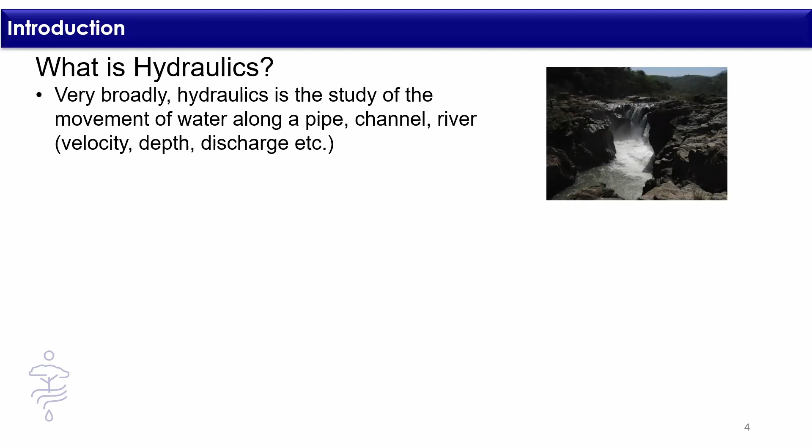So if we just get straight into it - in terms of the hydraulics, generally it's really understanding the flow and movement of water. From an engineering point of view, it's generally along pipes and channels, irrigation canals, etc. In this application, we're looking at the movement of water specifically through rivers.

In terms of why it's important in the eFlows - the eFlows, or environmental water requirement studies, environmental flow studies, reserve determinations - these studies go by various names. Maybe just a little bit of background: they are generally a requirement from the Department of Water Affairs, and it's really there as a voice for the environment.

So really to understand, if you are issuing water use licenses for abstractions, how much water can you take out of a system before you actually start compromising the health of the system, before the services that are provided start collapsing. And the other side of the coin is how much water can you add to these systems before you also start compromising their health.

And that obviously links to inter-basin transfers and also wastewater treatment works. So you're actually adding water to systems, and how does that affect the health of the systems.

So really the hydraulics component allows us to get an understanding of the water levels. Critically, you have a whole bunch of stuff going on in rivers, fish and inverts being one of them. Various fish species prefer certain types of habitat, and that's really linked to your depth of flow and your velocities. So yellowfish, for argument's sake, like shallow, fast-moving water.

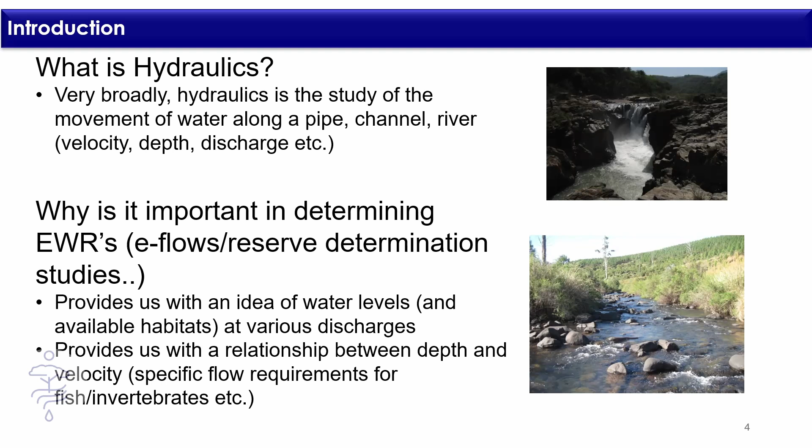Sarge mentioned a little bit about the IWMI project, the International Water Management Institute project. We were fortunate enough to be involved in this project last year. We managed to get some funding to look at some innovation around the eFlows and how we collect data, how we interpret that data, and how we can look at improving the confidence in those things.

At GroundTruth, we do run a full drone survey system here. We run LiDAR imagery. We do a lot of work around water quality and also looking at particle image velocimetry, which Udhav will chat to later - really a technique around measuring velocities of water from video footage.

The output data from that - being able to generate point cloud data for the bathymetry, so below the water level and above the water level using the LiDAR, being able to stitch that data together using imagery, looking at the velocity and tying that into a hydraulic model, which then could generate these habitat distribution maps, and improving your confidence in your results.

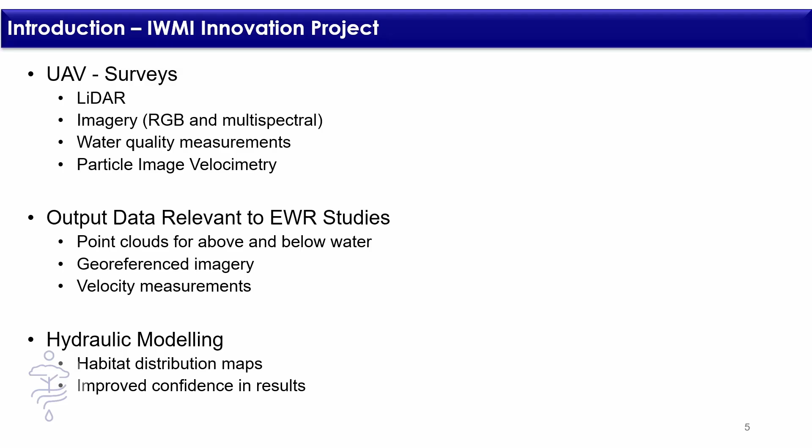So that was the IWMI project, which Udhav will touch on a bit later. Really the hydraulic modeling side of things - what we're wanting to do is achieve and develop a relationship between your depth and your discharge in your river. It largely links around the Manning's equation.

Really what we're wanting to do is, from a stage discharge curve, measure a specific point - so you have a measured discharge and a measured depth. You do some modeling, you generate a curve, and with increased readings in the field, you can improve the confidence of your curve. But basically, this will then link back to the various habitats of the fish, etc., that are in the river systems.

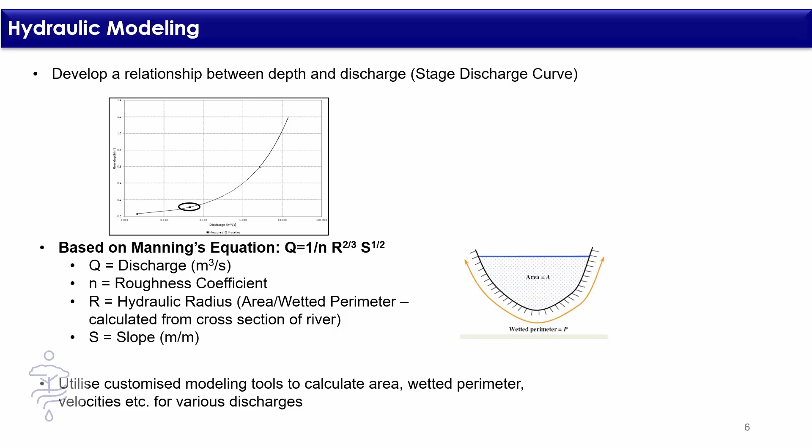So in terms of the hydraulics component, why do we need it? It's really, like I've mentioned, to inform the various specialist studies.

And I must note that these eFlow, environmental water requirement studies are very complex studies. They're generally carried out by a bunch of specialists who go to field. So you have a fish specialist, an invert specialist, a geomorphologist, somebody who looks at riparian vegetation, normally a hydrologist, and also a hydraulics person. So it's generally a team of about 4 or 5 people going into field.

And the hydraulics really links, it's cross-cutting across all the themes. So basically understanding the effect that it has on the habitat for fish and inverts.

From a geomorphology point of view, it's understanding the energy and velocities in your system to make sure that you create sediment movement, that you get enough energy in your system to actually roll those stones and cobbles over to create habitat for your inverts, to create breeding grounds for fish, to get that sediment moving. So you have to keep that into account as well. You can't just put up a dam, or take out a lot of water and drop your flows. Obviously your geomorph side of things is going to be compromised.

And from a riparian vegetation point of view, obviously your vegetation on your banks needs to be healthy to actually stabilize those banks to reduce erosion. So those banks need to be wet at certain times of the year to sustain that vegetation. And the hydraulics, once again, links into that in terms of looking at your depths.

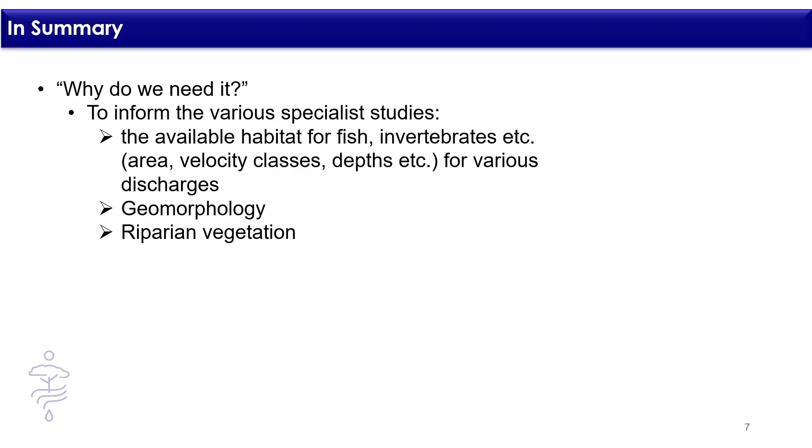So in terms of how we go about it, what we do first and foremost is identify a suitable site. Like I said, it has to satisfy the various specialist requirements. So it has to be a site that has habitat for fish, it's good for vegetation, it provides habitat for your inverts, so your vegetation, your sands, your gravels, etc.

And then what we do is we look for what we call a critical cross-section, that allows for critical habitat. The foundation of the eFlow study is to make sure that we try and find a worst case scenario cross-section in a river, a section that's highly sensitive to any changes in flow.

And the idea behind the eFlow study is that if you can satisfy your conditions for a very critical cross-section, then the rest of the river system should be satisfied. So we try and look for that worst case scenario cross-section and run our models on that.

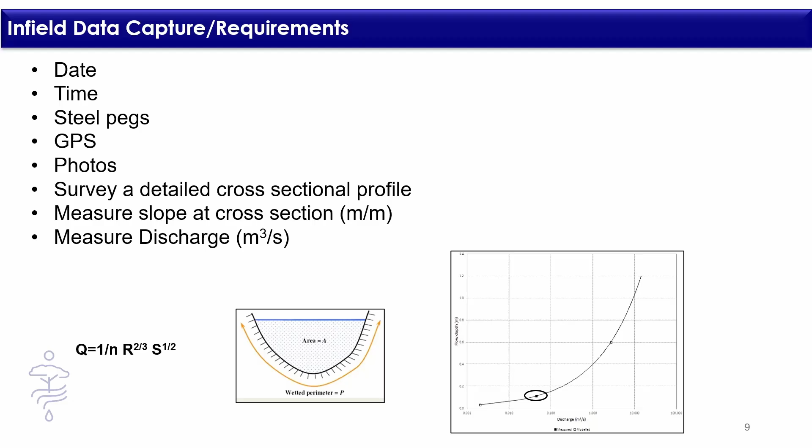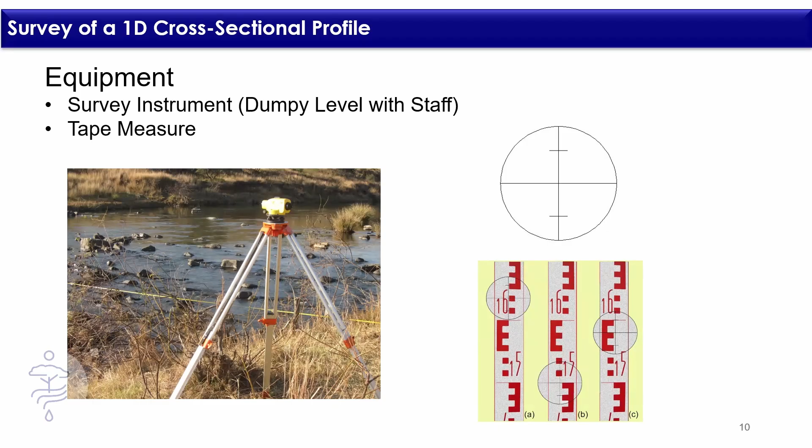Typically, we use just a good old dumpy level and tape measure. This is really for the 1D cross-section, so just a single cross-section through your river. And up until the point of the IWMI project, this is kind of what we were reliant on. And I think that this is where the innovation really has taken these studies ahead in leaps and bounds.

So basically, what you do is set up your tape measure and survey your detailed cross-section, and these cross-sections are, when I say detailed, they're highly detailed. So you're basically surveying every rock, every little hole in the river along your cross-section at your tape. And obviously you need to understand the relationship between your areas and wetted perimeter, also your surface areas for your habitat, for your inverts, etc. So they're very, very highly detailed cross-sections that take generally quite a long time to do.

The other thing we have to do is measure your slope, and this really is just taking your surface water level and doing that at the time that you measure your discharge as well. Then obviously looking at telltale signs on your banks for high water marks, etc., so that you can actually look at your slopes.

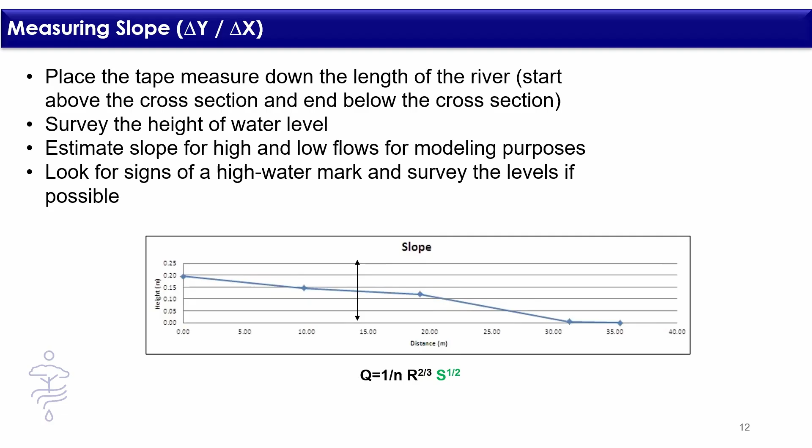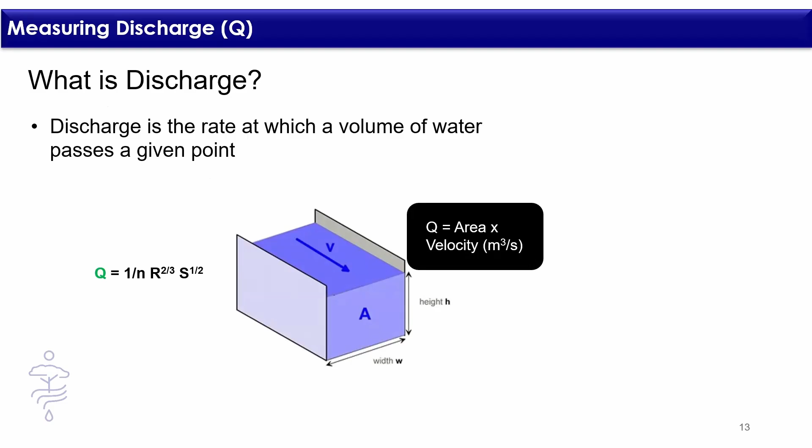In terms of measuring discharge, generally an easy thing to do if you've got a standard cross-section, just obviously your velocity and your area. In a river situation, it's slightly different. Obviously you have to go about it slightly differently.

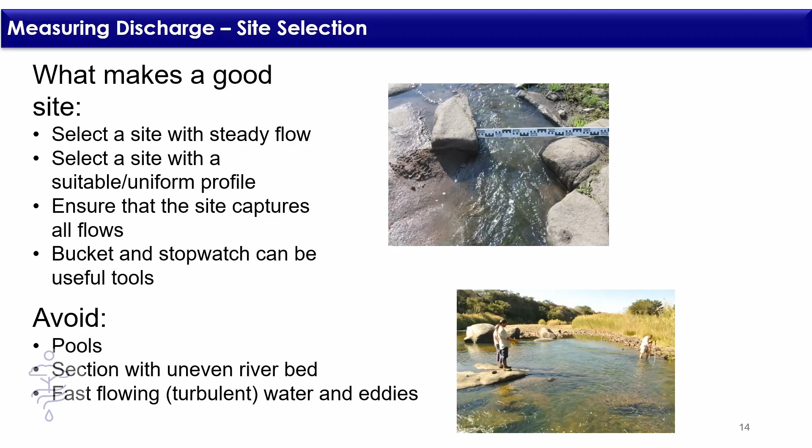The first thing you have to do is choose a correct cross-section, and you'll notice that the cross-sections where we're measuring your discharge generally are not the same cross-section that you use for your critical cross-section. The reason being, your critical sections generally have a lot of riffle type of habitat, lots of stones, fast-moving water, eddies, etc. So try and find a good site with steady flows, and make sure that you can get an accurate reading. Things to avoid are pools, slow-moving water, uneven bed, very fast-moving water, etc.

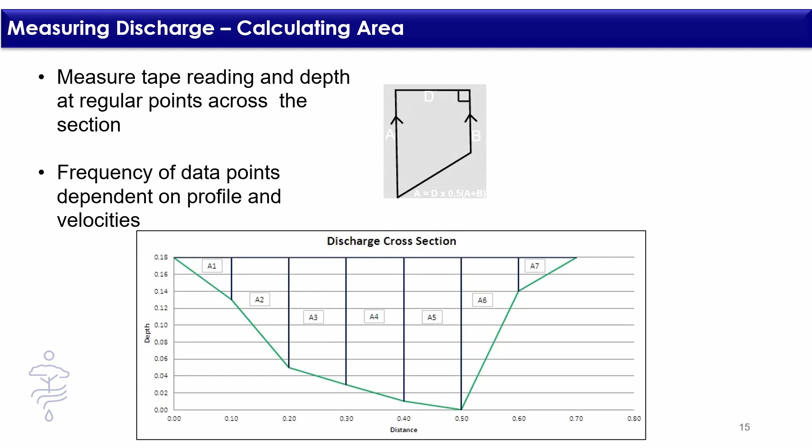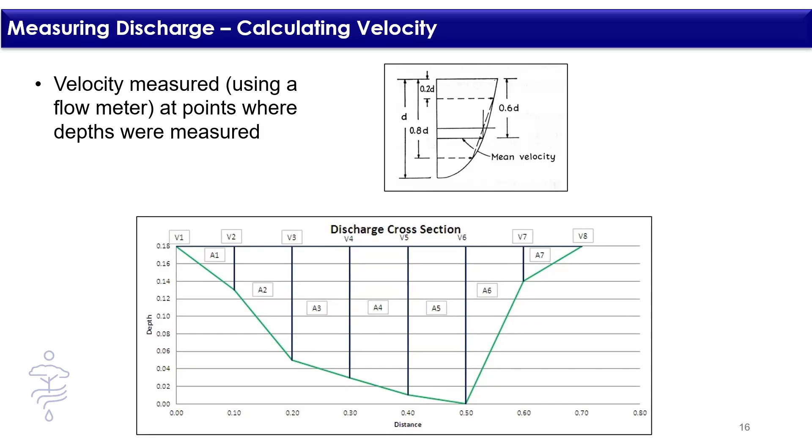In terms of the measurement, we basically break up the cross-section into different segments, measuring the width across and the depth at various segments, and then working out the area of each segment. We then measure the velocity at each of those segments and get an average velocity per segment. Then simply to work out the discharge is working out your area times your average velocity per segment, and summing that up for your cross-section.

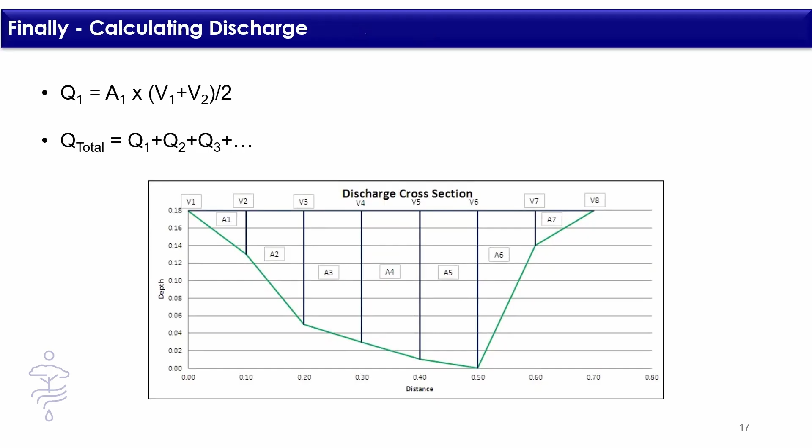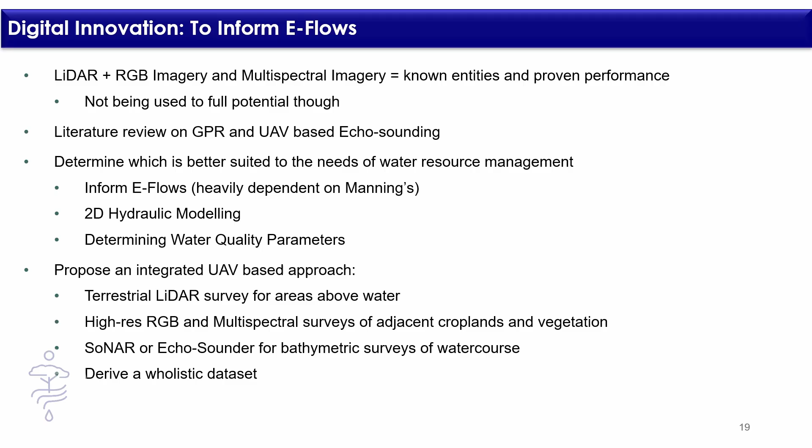So in the next few slides, you'll see exactly what I mean, which will make it a bit easier to picture what I'm talking about.

In terms of echo sounding bathymetry, there's a range of different types of sensors out there, and generally they're not used with a drone. So another thing we did was develop a system that could be integrated with a drone so that the survey could be unmanned, because operating this little unmanned vessel without a drone could be quite tricky, especially in fast-flowing deep waters with crocodiles, hippos, or any dangerous creatures in the river.

If you look at the image on the right, this survey vessel is generally operated manually. So for a single cross section, the survey vessel moves up and down, and you collect data.

What we did was find an echo sounder, retrofit it with a GPS unit, and use it to survey at a ping rate similar to a drone. We collect a point cloud, and from that you can generate a profile of anything underwater, which would look like this profile on the bottom left.

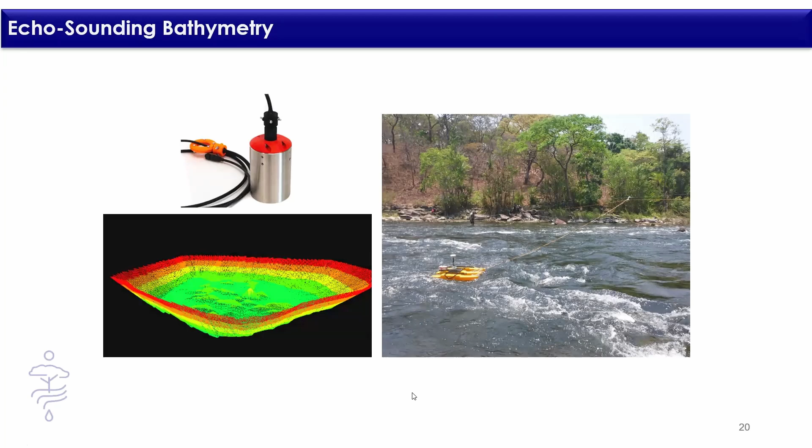This is the GTE Explorer, our unmanned survey vessel. On it, you can connect either an echo sounder or a sonar device. We also added a turbidity sensor, temperature probes, and TDS, total dissolved solid sensors, so water quality and depth parameters can be collected simultaneously.

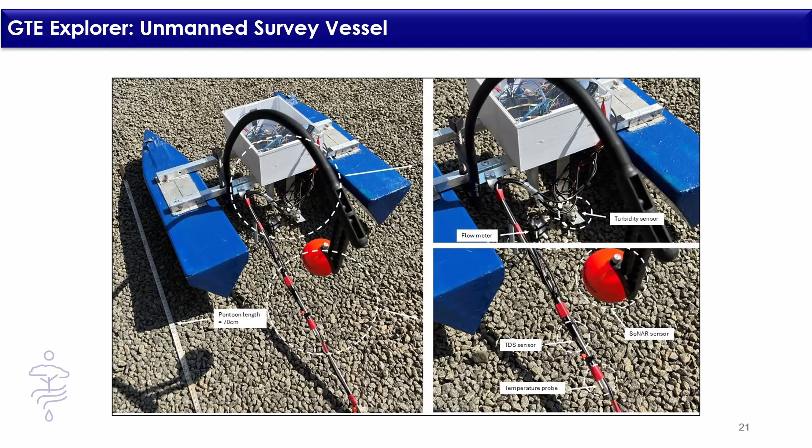During a flight like that, we collect echo sounded or sonar data, the underwater points, and this wasn't done in the drone space before. If you wanted to do an underwater drone survey, you'd either use a GPR device and fly very close to the water surface, which isn't the safest thing to do, or use very expensive LiDAR surveys. Coupling sonar and LiDAR together was quite a new thing which we investigated.

We found that this approach is suited not only to bathymetric surveys, but can also be used to get data on sediment in your channel or water body, and it was much more efficient than a traditional survey. You can imagine setting up a dumpy level and going across a cross section to get one cross section of your river profile, whereas with this device you can survey your entire reach much more safely and efficiently. The data we collected was suitable to be integrated with the LiDAR terrestrial data to form a complete elevation model.

So yeah, maybe before I go into the elevation models, I'll just quickly speak about the water quality monitoring. Here you can see this is a piece of river, an entire stretch where we collected total dissolved solid and turbidity data.

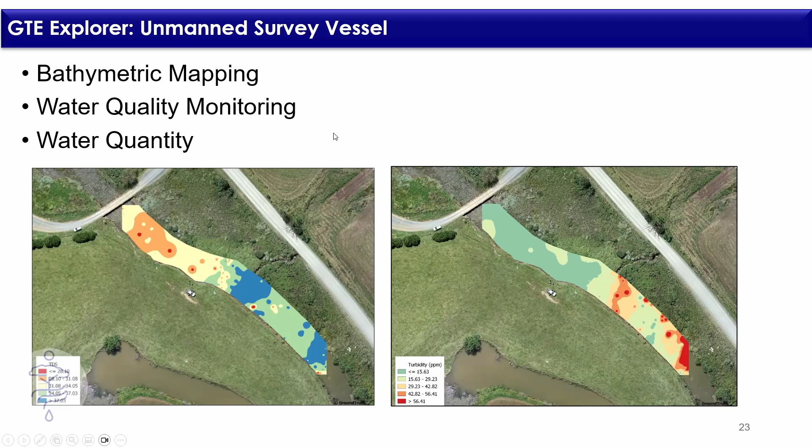This was all collected with the drone and the unmanned survey vessel. This helped because you're not only getting your water quality data at a single point, you can see how that changes across your river reach. If you look at this picture, there's a little cut-in on the left bank of the river, and you can see the total dissolved solids and turbidity actually increase there. This wasn't a key thing to actually inform the eFlows, but it was a useful outcome from this project.

In terms of the bathymetric mapping, things start becoming a bit more clear. On the top left, you can see a high resolution image of the same river system. On the right, you'll see a traditional terrain model where if you pull a cross section through the river, it will be flat because your LiDAR data does not penetrate the water. If you look at the bottom, the colorful image, you can see the elevation that we collected from the echo sounder used for the survey.

We then stitched the echo sounder data to the LiDAR data and generated this topo-bathymetric map on the top right, which is the full river profile. You can see everything above land and below the water's surface, and you can even see that little cut-in on the right that I was speaking about earlier.

Below that is just an example of a single cross-section that you can pull from the model if you need to. If you look at this blue line on the cross-section, if we didn't have the echo sounder or sonar data, your cross-section would look flat like that because LiDAR does not penetrate water. That's where stitching the two data sets becomes important.

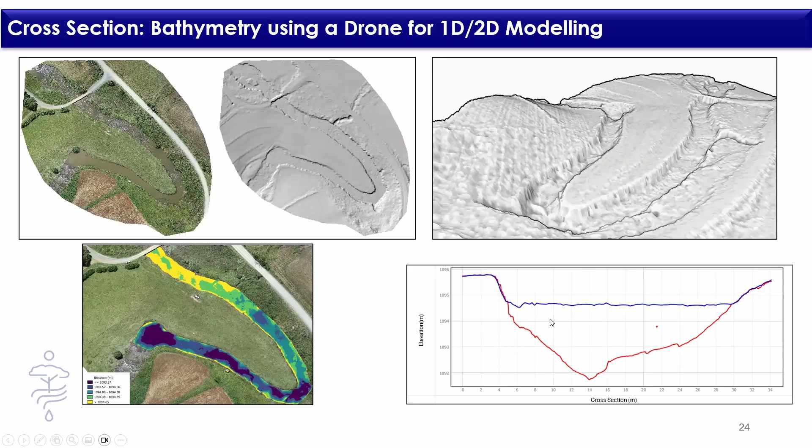This is just another example, the Olifants River, in Kruger National Park. This is a stretch of river that we surveyed, and you can see again the level of detail you can get when you stitch your above-ground and underwater profile for a river. You'll see how this becomes helpful when Kylie speaks a bit later on.

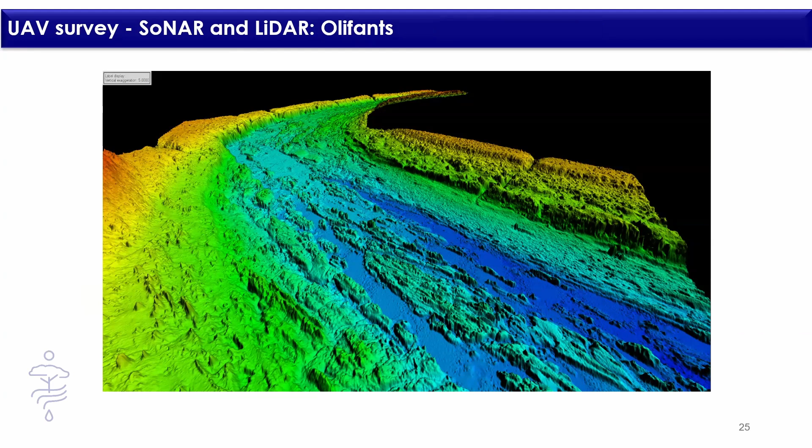This is just a comparison. Like Trevor was saying, we go very detailed normally. If you look at the blue line, that's your total station cross-section for the Olifants River, and you can see there's quite a few points along it. If you look at the gray line, which is the data pulled from the terrain model as a single cross-section, you can see you pick up a lot more detail. Overall, the correlation is good with your total station data. Between your survey points, you're picking up a little bit more variation with this digital terrain model that's generated with the two data sets.

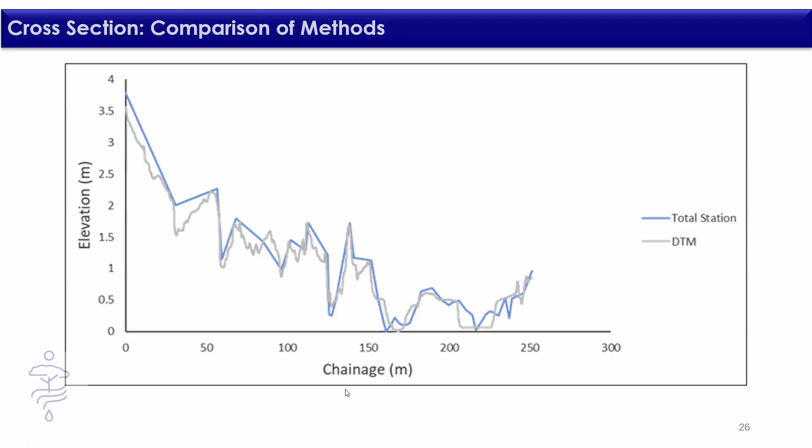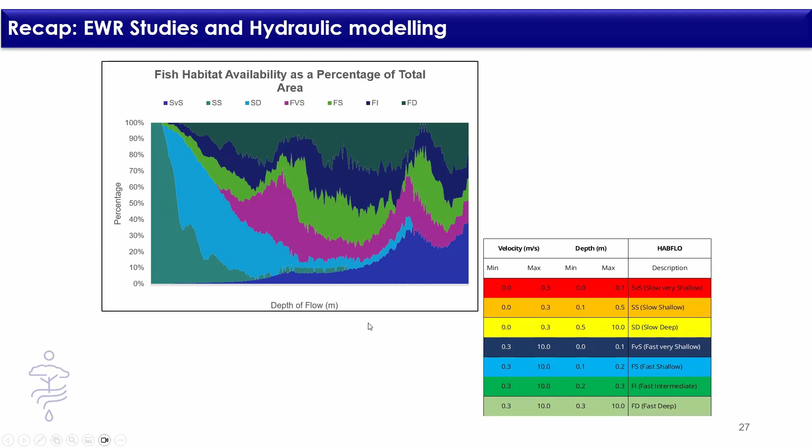Just a quick recap, this is what Trevor was speaking about earlier. You can see this is how your habitat classes look for a single cross-section, and these are your descriptors if you wanted to look at them in more detail. What we then did was look at whether we could actually use those descriptors for a 2D model.

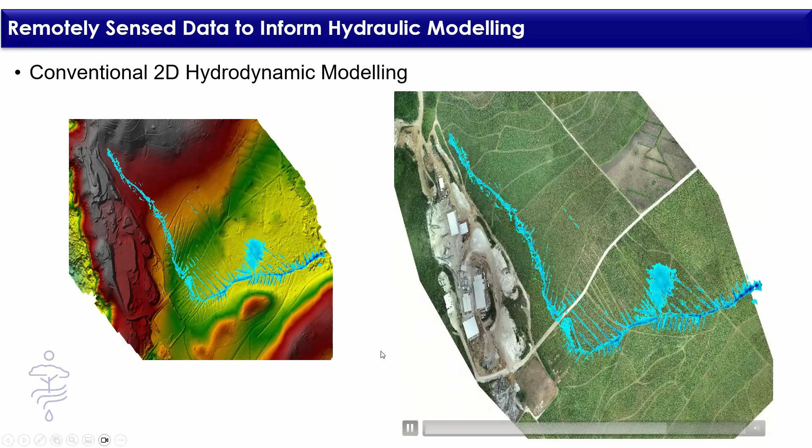These are just traditional 2D models where you can model how your velocity and depth change over time. What we did was go into a normal 2D model and modify it to include your habitat classes, which was also not done before with the specific 2D model we used for the project.

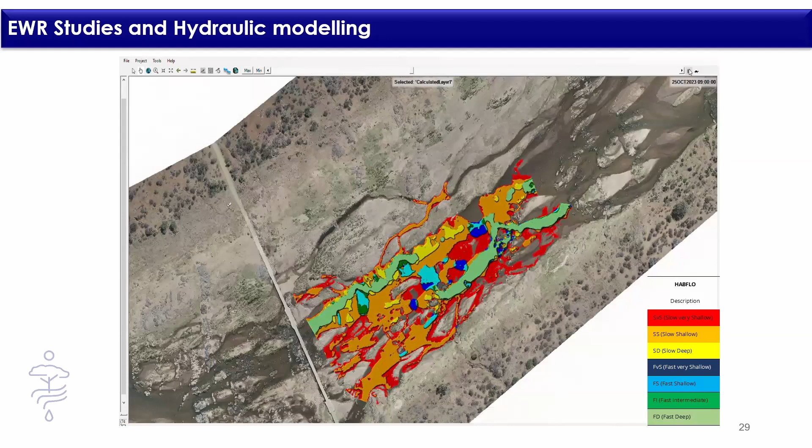So this is an example of the 2D model now with your habitat classes. You can see as your flow dynamics change in the river profile, how those habitat classes actually change. When Kylie takes over, she'll explain the significance of this. Just to emphasize, this is now at a 2D level, not just a single cross section, you can see it across the entire reach, and all of this is generated using the data from a drone and the unmanned survey vessel.

Okay, so now I'd like to hand over to Kylie to explain. Oh sorry, maybe one last thing. From the study, we also looked at how we can take it a step further.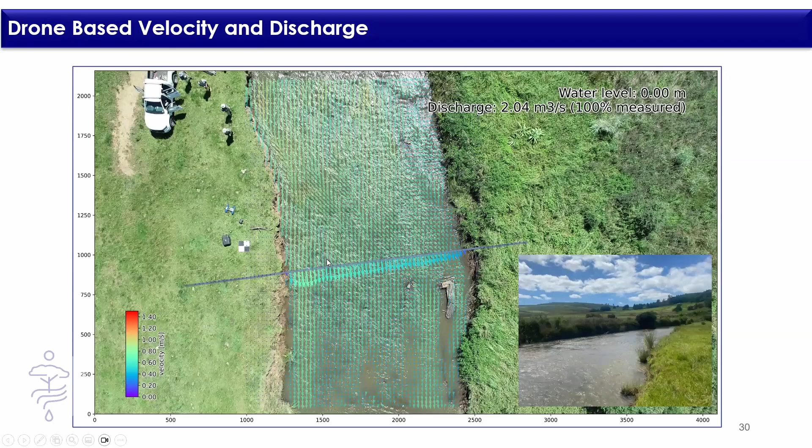So something that we're working on now is actually looking at estimating discharge and velocity, and depth, using a survey vessel and a drone. We call this the virtual weir concept.

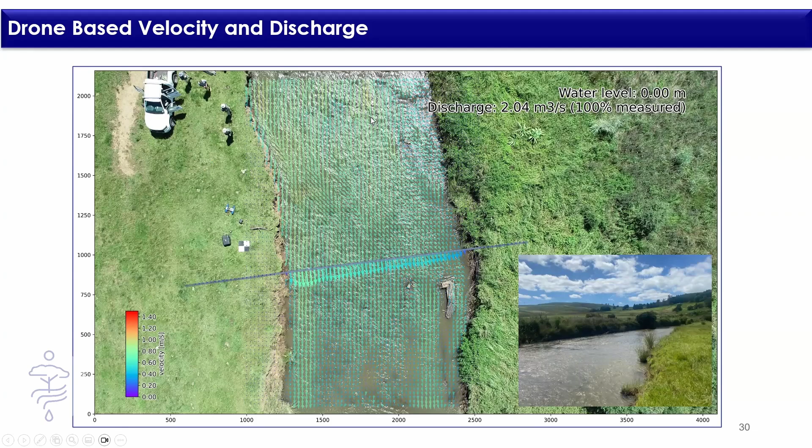This is where particle image velocimetry comes into play, where we actually track movement down the river profile and convert that into a velocity. Now you can see you get velocity calculated across your entire river profile, and then you can also get your average velocity.

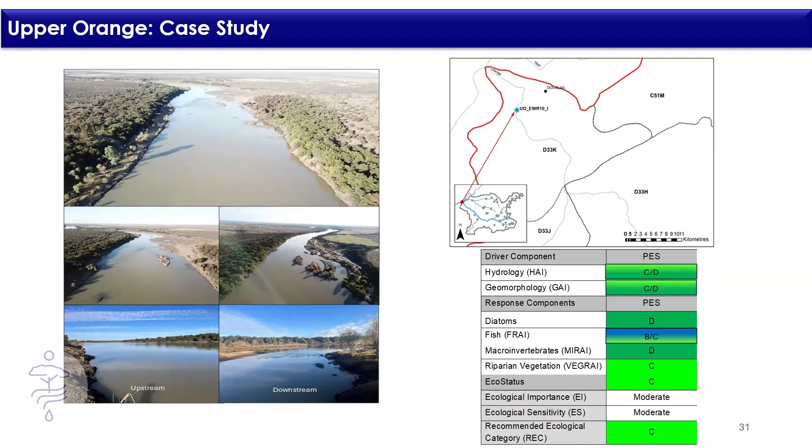So at this upper Orange site, initially we went and did the 1D. And when we sat and did the workshop, we were actually quite stumped because, as Trevor mentioned, selecting that site is extremely important. It's trying to find the perfect site for the ecological components and for the hydraulicians.

So we like areas where there's a diversity of habitats, where there's riffles, stones, riparian vegetation, inundated vegetation, some pools, some slow-moving water, so there's a diversity of those habitat classes. But when the hydraulicians come in and they're doing the 1D, they need to make sure it's a straight part of the river reach.

It's not sloped, can't be straight after a weir or any other type of obstacle. So sometimes we just can't find that perfect site.

And that example happened at this particular site, where the 1D survey was done along the pool upstream, but there wasn't any of that critical habitat from a fish or invertebrate perspective. And we surveyed further down where there were the riffles, but it wasn't a good site for the 1D because it was a bit too braided, with side channels, which is not a good site for the 1D profile.

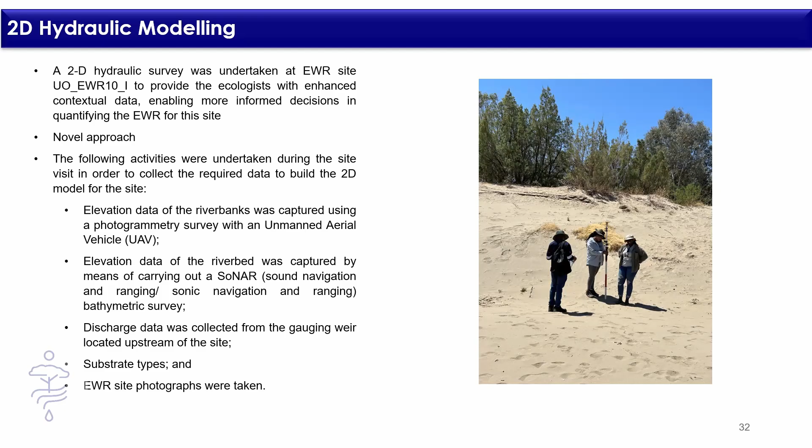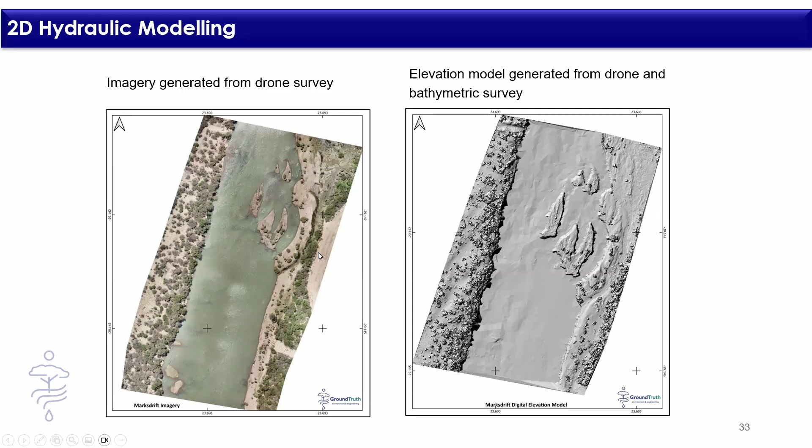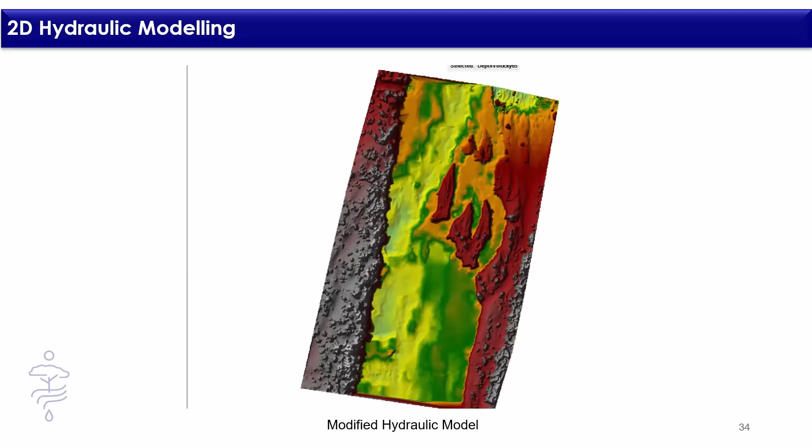Where Udhav's cursor is, that's where we had our 1D initial profile, whereas the ecologists were working here where the channels are, because that's where the critical habitat was, right in the middle of the reach. That's where there was quite a bit of braiding, side channels, and some islands, so not suitable for 1D. That's why we were motivated for this 2D, because it now encompassed that critical habitat for the ecologists as well.

What was so fascinating is when we push play on this, we can start to see, from an ecological side of things, when those side channels are starting to improve in their different types of habitats. When is the fast, deep habitat coming? When are the critical habitats becoming exposed, so the water is not going over the rocky riffles? We obviously need the water to be going over it, particularly for the invertebrates.

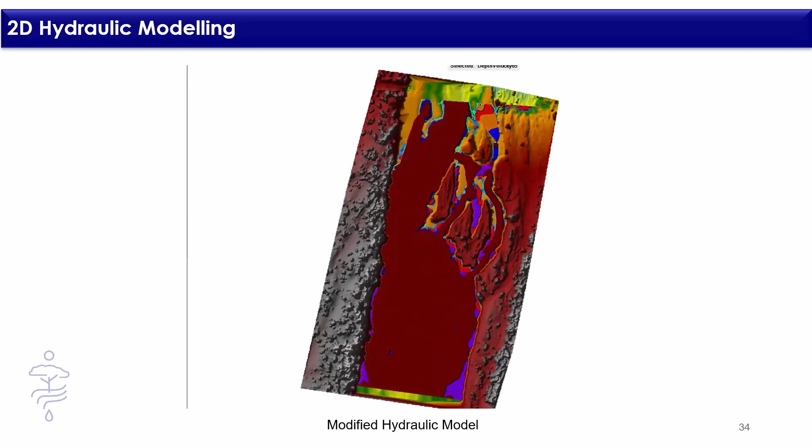As Trevor mentioned, some fish species in this reach, particularly the yellowfish, love the fast shallow and fast deep channels. So we're trying to identify, in order to set that ecological water requirement, where it's most suitable in terms of the habitats from a biotic perspective.

This generally starts off with the hydrologists. We say we want to try and aim for a category C, which in our language means moderately modified system. So the invertebrates, fish, geomorphology, riparian zone, and water quality are all moderately modified within the system, just because of all the other anthropogenic impacts. Water quality and flow are modified - with the upstream Gariep and Van der Kloof dams, the base flows are constant, there's not enough floods and freshets, they've been altered. So it's a very artificial system from a flow perspective.

So for us, we start off saying, what happens if there's 30 cubics coming through the system? How are the habitats going to react to that? The hydrologist will plug in 30 cubic meters per second into her model, and then we see - is it too little water? Is there hardly any deep channels, or are these side channels lying high and dry?

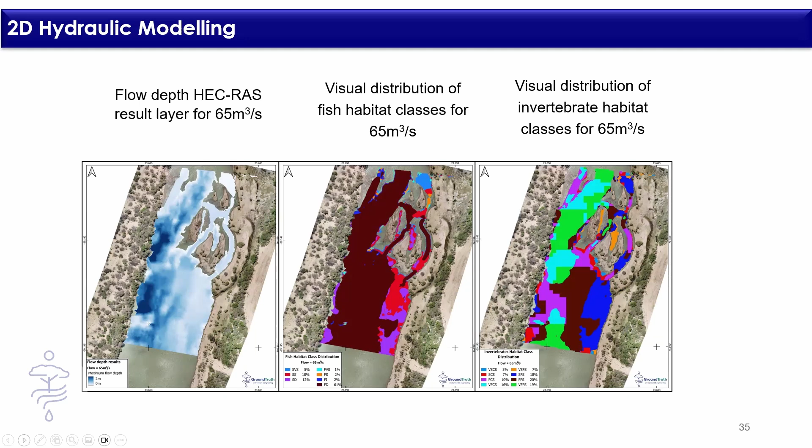So we don't only use these 2D models for ecological water requirement quantifications and setting rules for rivers from an ecological perspective. What we also use them for is we take the HAB flow from the models generated from Udhav's work and put it into our ecological model, called a fish invertebrate flow habitat assessment model. We bring in those different flow velocities, average and maximum depths, and the various habitat percentages available for those velocity depth classes for the fish and invertebrates.

We select indicator fish and indicator invertebrates that respond specifically to fast flowing water, because we know that if we're in the Lower Orange, for example, where it's a yellow fish and a great tourist area, and we start to reduce the flow, those yellow fish will respond immediately, which could damage that population. So we use that HAB flow and run our model to assess the consequences from an ecological perspective in terms of change in flow and future flow scenarios. For example, what if they come and develop and construct a new dam? What's going to happen to the flow?

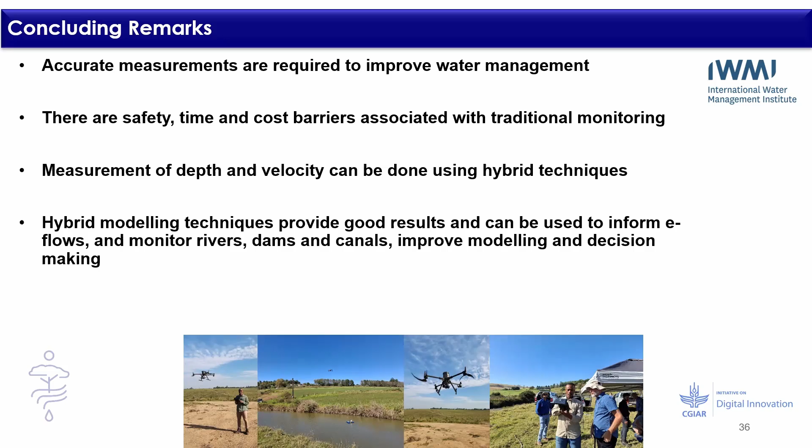Thank you so much for the presentation. I just want to say a really big thanks to Trevor, Udhav, and Kylie. You guys definitely weren't gatekeeping any information in terms of the methods you employed for these case studies. It's mind blowing to see the new dimension that all these 4IR technologies bring to the space of engineering and ecology and interpretation, in terms of improving data collection and getting better results at the end of it.

Every aspect of it just gets better, from recording to data crunching to the results, and then even enhancing the interpretation of it. I'd like to touch on the ecology stuff too. I think it's incredibly important, and the relevance is coming through more and more these days. I've seen government departments tightening the accountability of stakeholders, whether that's corporations, farmers, or water use authorities. Even in our own spaces, you see big corporations taking out major bank loans and requiring environmental studies for their loan applications, with remedial work needed in lieu of the assessments. And on the technology side, I think presenting case studies like this is incredibly important.